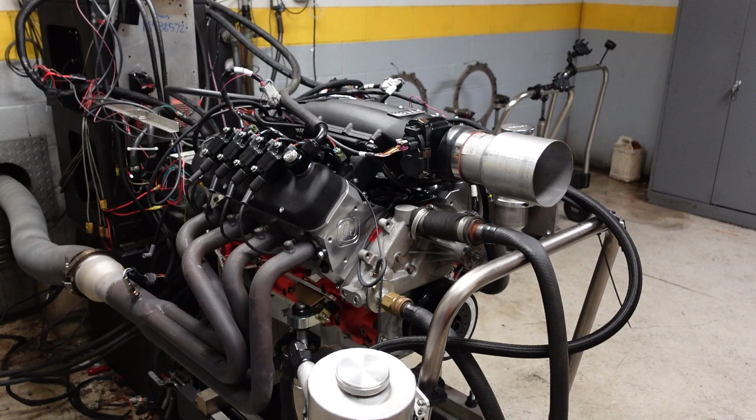This engine is going into a C6 Z06 that competes at shift sector half-mile race events. The combination is an LSX engine block, our Smeding 441 rotating assembly, 13.5 to 1 compression custom pistons with lateral gas ports. We are running a set of F710 hydraulic roller cylinder heads.

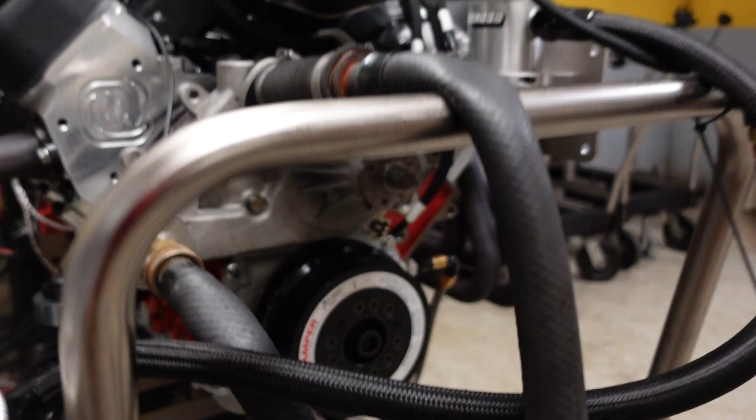And the camshaft is 255, 268 duration at 50, 112 lobe separation angle, installed with an ICL of 109. And for valve lift, we have 671 on the intake and 659 on the exhaust. Because it's going in a C6 Z06, we are using the factory dry sump system and just running it into an aftermarket Moroso tank.

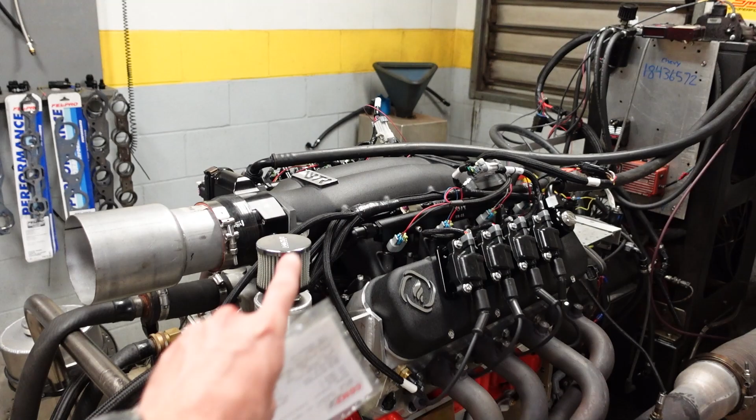The previous intake manifold test we did on my LS3 based engine might have been a little unfair to the BTR. That motor was only a 404. And I think that BTR manifold needs a bigger cubic inch engine to really shine. So this engine should be a good match for it. This will be hopefully the redemption of the BTR Trinity intake manifold. But we will find out in a second.

We've already broken in this engine and we've actually already optimized the tune-up. So we're gonna go straight into pulls. We're gonna start with this BTR intake and then we'll go to the MSD, kind of have the battle of the low profile guys. And then we'll finish with the big dogs, the high ram and the carbon PTR.

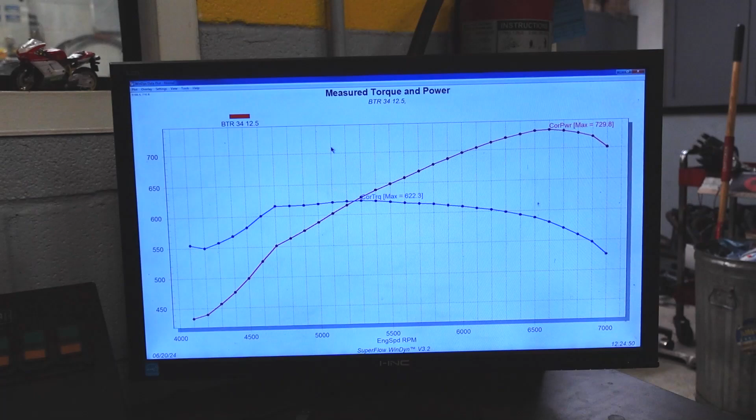Here's the best pull from the Brian Tooley Trinity V2 intake, 729.8 horse, 622.3 torque. We have since then removed the Brian Tooley and installed the carbon PTR. We really wanted to test the MSD manifold as well, but unfortunately with these cylinder heads and their custom application-specific steam port kit, we couldn't install the MSD.

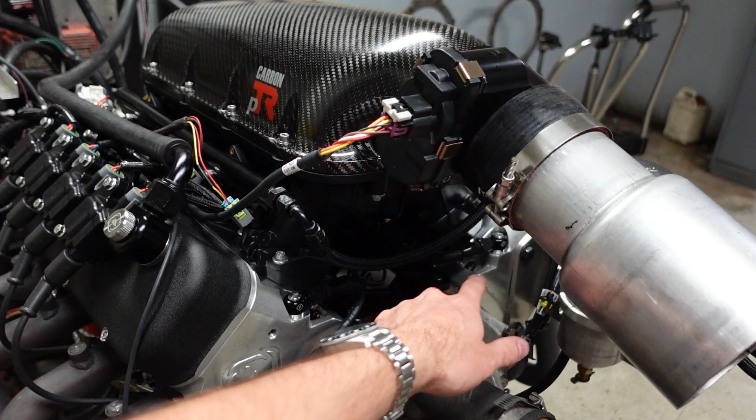And unfortunately, I can't put just a stock steam vent kit on here, so we are a business, we gotta keep the ball rolling, we gotta keep the clock running. So we're gonna go straight to the carbon and see how much power it makes.

All right. Let's now remove the lid and I don't want to do the mids. Let's just go straight to the shorts. Here's a dyno curve from the PTR carbon intake with the tall runners. 731 horse, 666 foot-pounds of torque. Let me overlay it with the BTR.

And here you can see that longer runner just shooting up the airspeed and increasing that torque. They actually made very close to within the same horsepower, but that longer runner is making all that power and torque further down in the RPM range, which is always a good thing. Now we're going to pull the lid off and swap in the short runners.

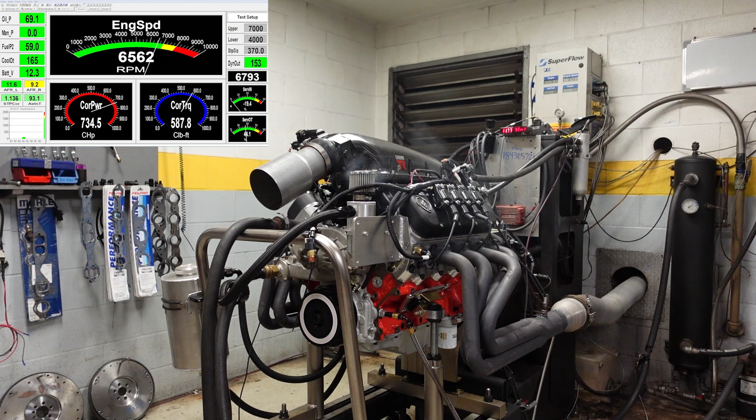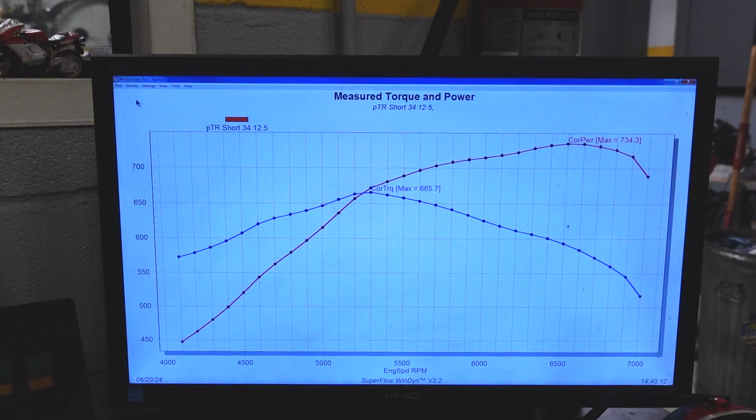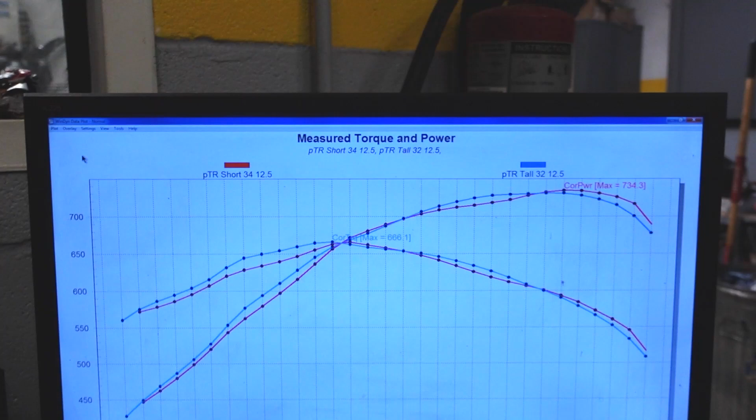Okay, just got finished running the engine with the short runners in the carbon manifold. 734 horse and 665 torque. Let me overlay it with the tall runners. And here you can see how we sacrifice just a little bit of torque down low for a little bit of horsepower up top. Very, very subtle, small changes on an engine this big and this taxing.

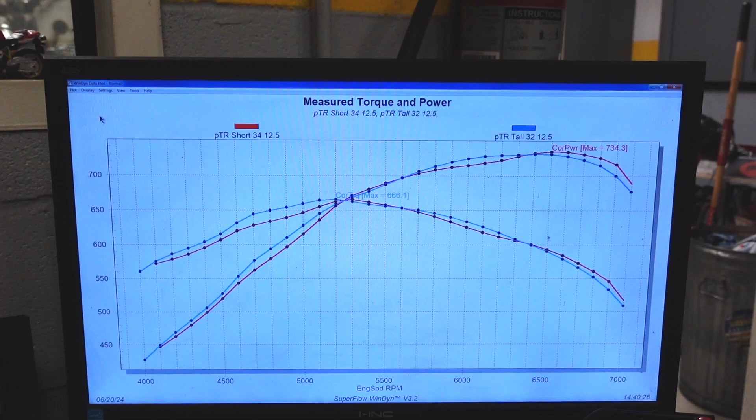But this is a good illustration of how a short runner and a long runner can impact each other. Now we're going to pull the carbon off and put the Mac Daddy of them all on, the Holley High Ram.

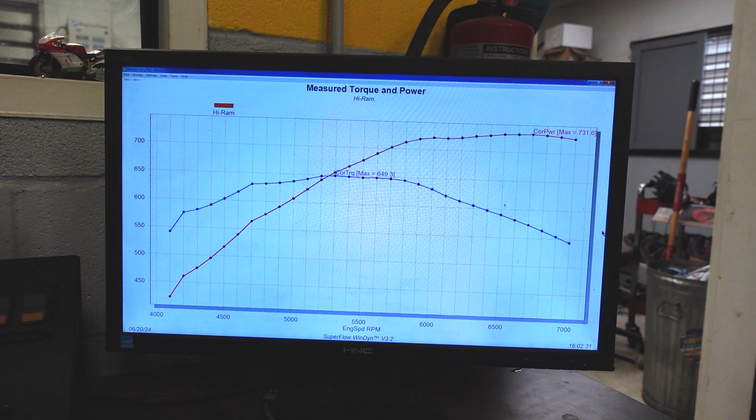Here's the final curve from the high ram. It made 731 horsepower and 649 torque. What's nice about the high ram intake is even as it peaks, it really just flattens out and doesn't just fall on its face and drop off really hard. Let me overlay the high ram with the short runner carbon version.

And here you can see the carbon actually did make a good bit more torque and horsepower from 4,700 to 5,700. But at the very, very top, the carbon starts to go turbulent and drops off. So I think for a race application, leave the high ram on it. You could then rev this engine out a little bit further, just let it go flat, shift back into the power curve. That'd probably be the best option for this combination.

So last time, let's put all of them up, the PTR, the high ram, and the BTR. And here you can see the BTR manifold is this red curve underneath it. And then the two longer runner manifolds with their longer runners are making so much more torque throughout the curve, and they stay above the whole way through.

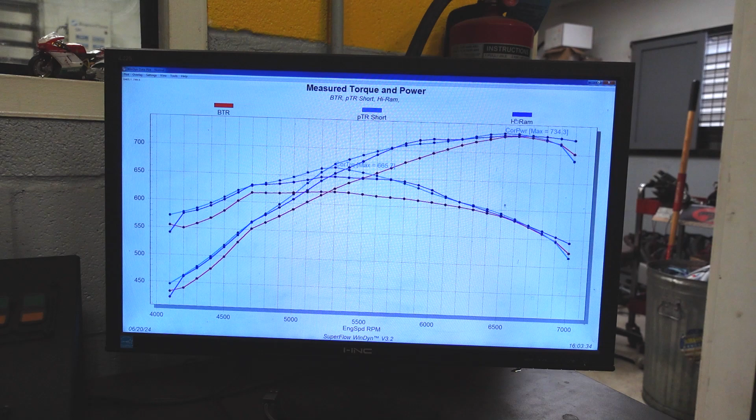The BTR basically matches them on peak horsepower on this engine, but tapers off a little quicker than the high ram does. So if you have a stock hood and you don't want to cut your car up, BTR is still a great option. But keep in mind, you are going to be down about 50 foot-pounds of torque through the meat of the curve compared to the longer runner, taller, high ram variant manifolds.